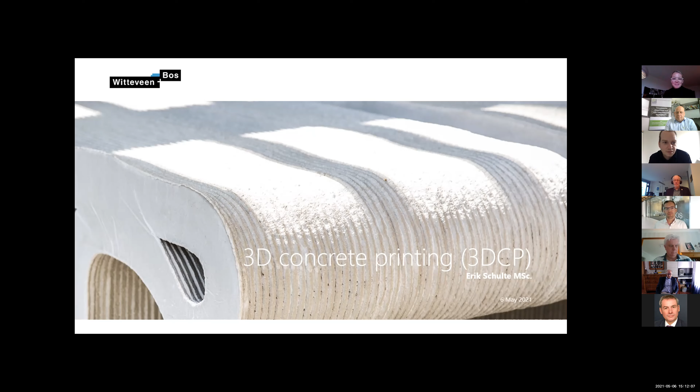Briefly about myself and my company: I work at Witteveen+Bos. We are an engineering consultancy firm founded in the Netherlands, and our head office is still there. We have about 1,300 employees, 8 offices in the Netherlands and 13 abroad. We do not construct any projects ourselves; we're just engineers. However, a few years ago, we bought this printer, this robot, to learn from this innovation. Currently we have a robot in the Netherlands and in Dubai, where we print projects together with the contractor, and one in Singapore for further research.

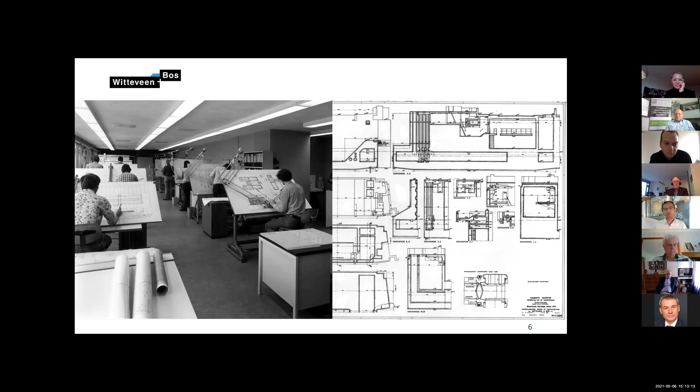50 years ago, long before I was born, the engineering firm looked something like this. And although I did learn to draw by hand during my study, soon AutoCAD was there. Initially only a pencil and a drawing board was the tool of the engineer. Everything was two-dimensional, and the contractor made it into 3 dimensions.

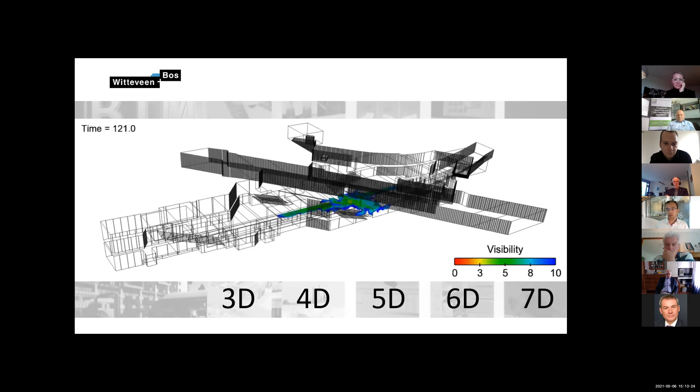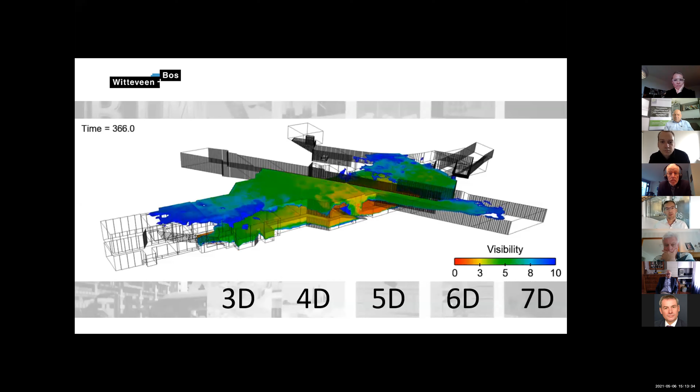Currently, engineering has evolved a lot. All our designs are made 3-dimensional. Here you see a simulation of a fire in an underground station in the Brussels metro. We make a digital twin, so we can investigate escape routes to the nearest fire exit.

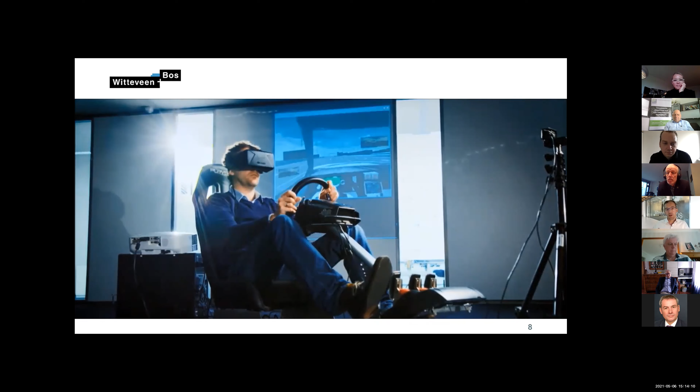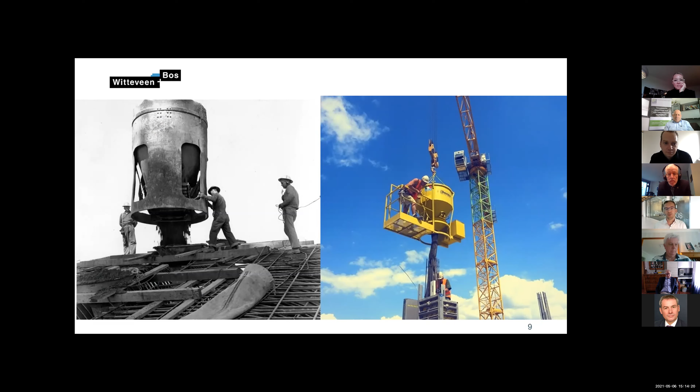So in engineering, there were a lot of changes, but looking at construction, not much changed in the same period. If you look at pouring concrete, it's still done the same way as 50 years ago. And looking at steel construction, it's done the same way too. Okay, maybe a few more safety measures on the side, but the construction did not have the same speed and evolution as the design did.

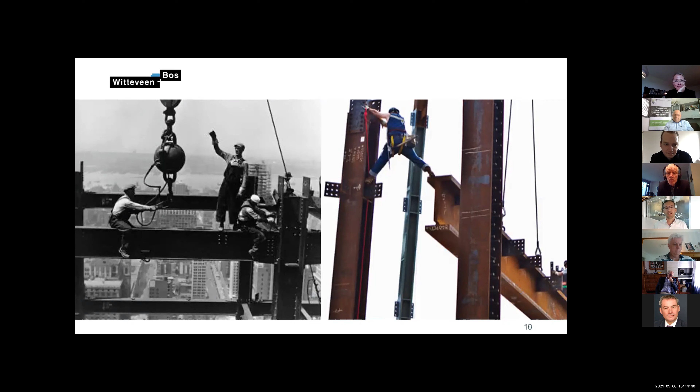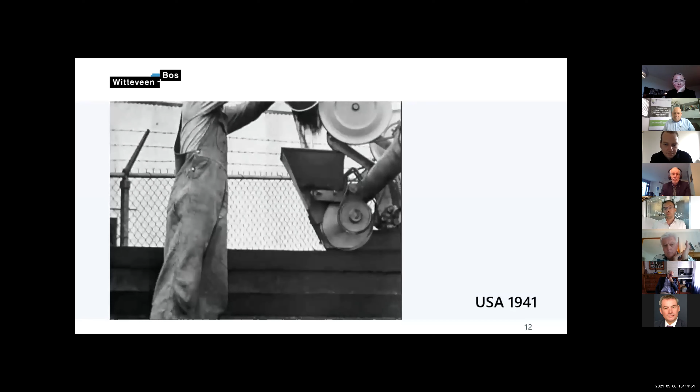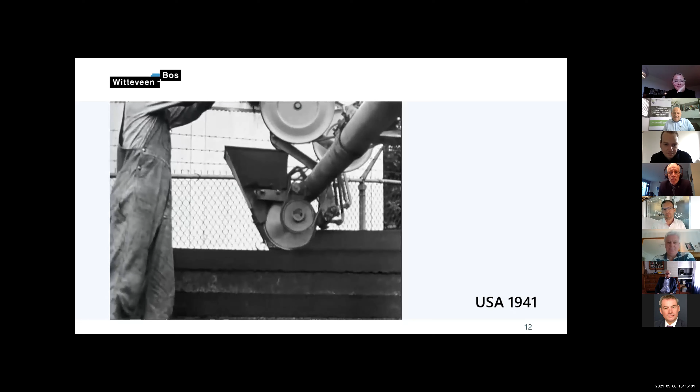But actually 3D printing is not new, because already in 1941, William Urschel invented this wall building machine. Again, not safe to put your hand in the machine, but he was able to pour concrete without formwork. You can look it up later on YouTube. A few years later, in 1944, he patented this machine, a wall building machine. But then it was silent for decades.

Only up to 1995, Dr. Khoshnevis found a contour crafting machine, and he actually built that machine. But then again, it was silent for many, many years, only into this century did projects really pick up. And a big evolution is ongoing for 3D construction in general.

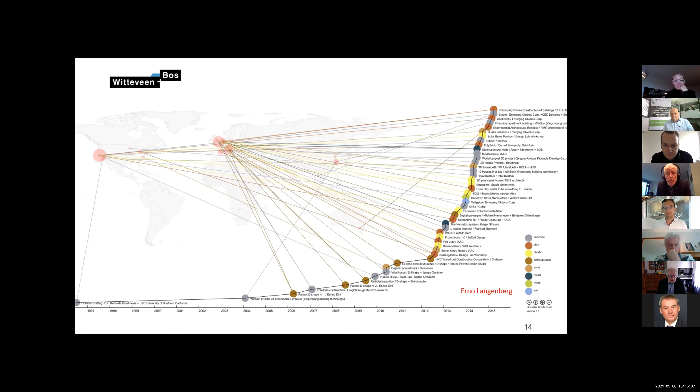Okay, how about the research for concrete printing? You can print in plastics and all sorts of stuff, but let's focus on concrete printing.

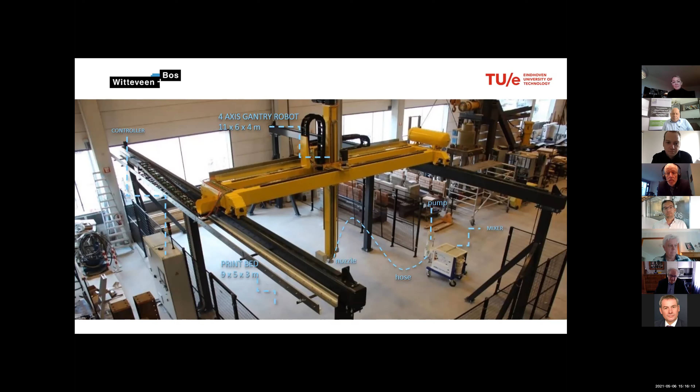In 2015, we joined the University of Eindhoven with the gantry printer. This printer has possibilities to move on the X, Y, and Z axis and actually lay a small slab of concrete, mortar, no stones in it. When you put this picture in motion, the left-hand side is actual speed and the right-hand side is fast forwarded. You see the printer is actually a 2D printer.

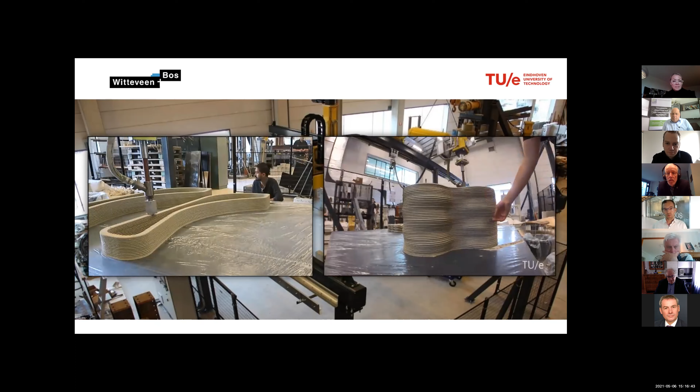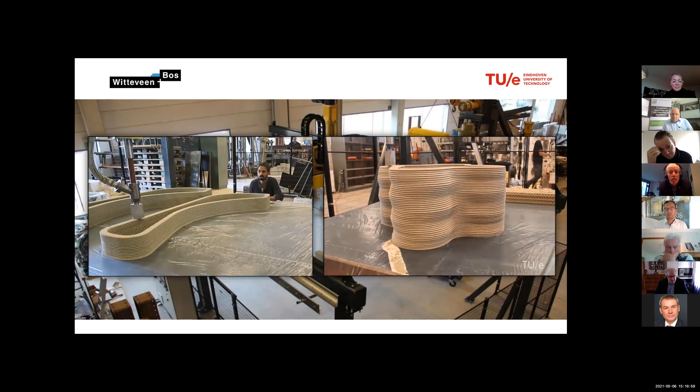It only prints layers. This is the key problem to engineer: the speed and the length of the printing path. The difficulty is that you have to print fast enough to have bonding of layers, so the concrete should be wet for the next layer to bond on. But on the other hand, you should print slow enough to get the concrete stiff enough. And the stiffness I can show you in the next movie. Look in the back on the left side.

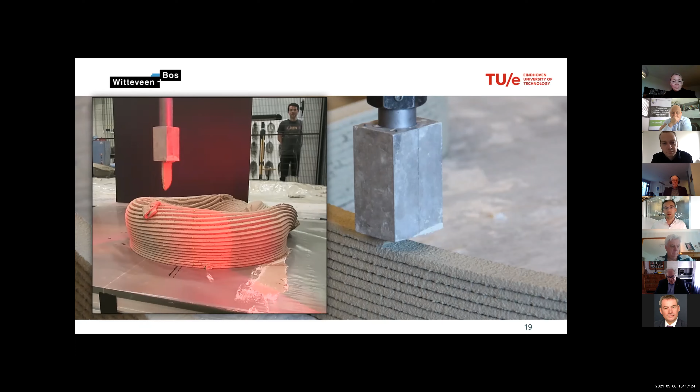It collapses. This is the key difficulty in printing concrete. On one hand, you want a stiff and dry mortar, then it will be stable. But on the other hand, it should be wet enough for bonding, and especially that bonding is key for structural concrete. So bonding is tested as well.

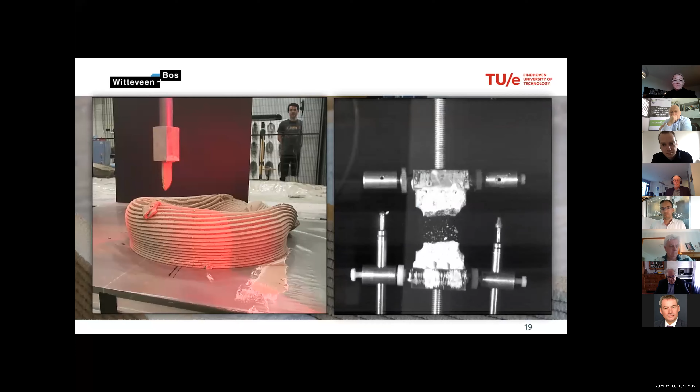How does the material look like? Difficult word, I'm not going to try to pronounce this, but actually you can compare it with ketchup. By itself, it behaves in a solid state, and only when you put in energy, it becomes a fluid. Same example is toothpaste: it is stable in the tube, when you press it, it becomes fluid, but on your brush it should stay there. So that is the difficulty in the research of the concrete mortar.

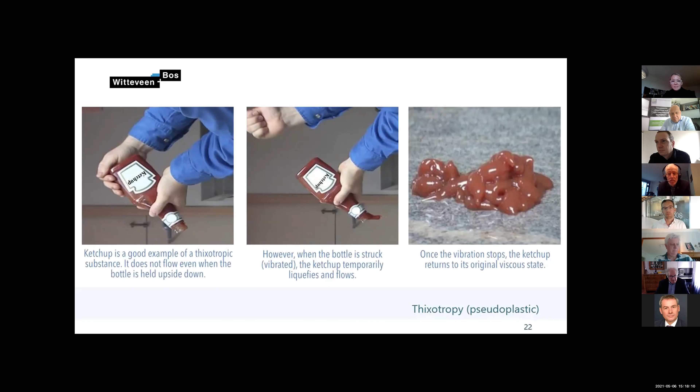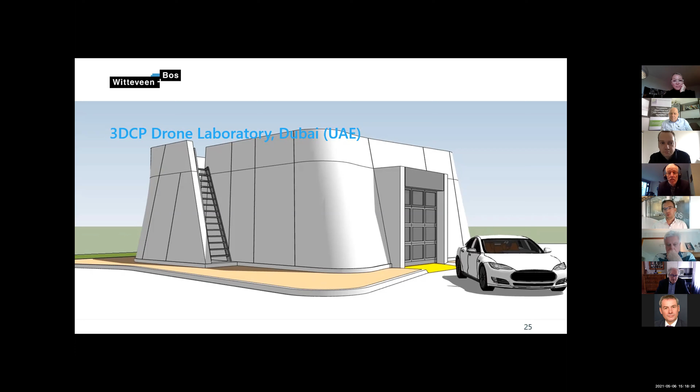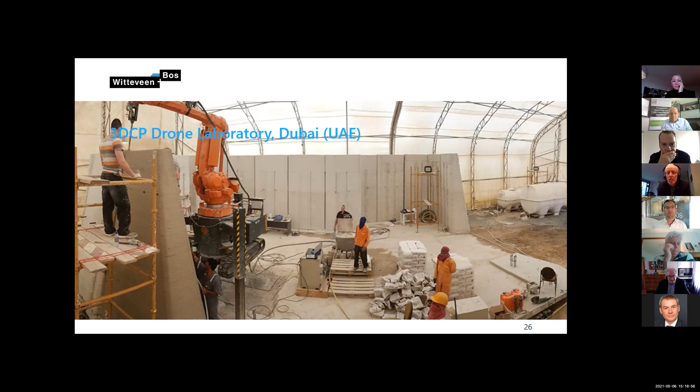Okay, some example projects. This building, you can say if it's a nice building or not, was designed for Dubai. On the roof of this building, drones should land for inspecting the solar fields. This building was printed on site, not in a factory, but in situ. The difficulty here was the climate - we're working in a desert, and what we all studied at the university can be thrown away because it is dry, it is hot. All environmental conditions are different. So unfortunately, we had to build a large tent around it to manage the climate a bit. But in the end, the building was finished.

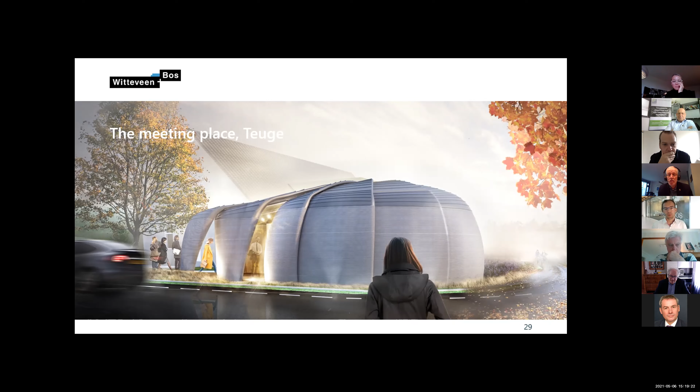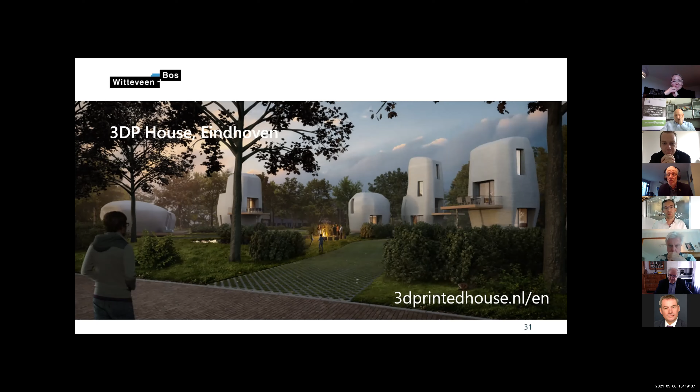And maybe you've seen it in the news - last weekend, the first 3D printed house was opened in the Netherlands. This milestone project is in Eindhoven as well, and this picture is right from the news. You can even see the grass rolls are still fresh, you see the lines in the grass. So this is completely new and innovative. People are renting it already.

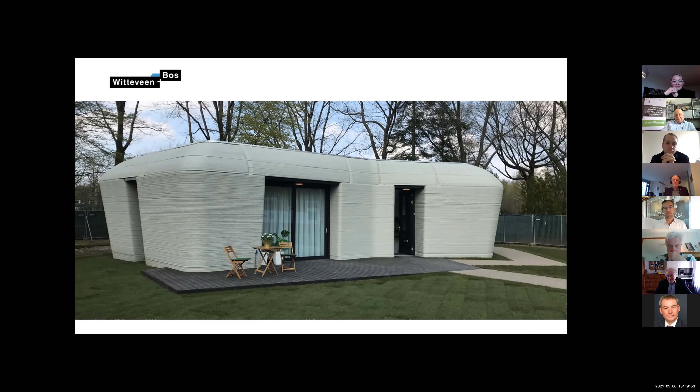Beside the buildings, we also tried to design a bridge. You can argue about if it's a nice bridge or not, but we started simple because we have to convince the government that it is safe, and that was the difficulty. So we started simple, and it looks like pulling a bookshelf, like pressing books to each other to hold it with post-tensioning cables. The middle part is printed, and the end parts are precast concrete blocks with pre-tension cables. In the end it was opened, and it was the first 3D printed bridge. You hardly can see that it is printed, but it was the first step.

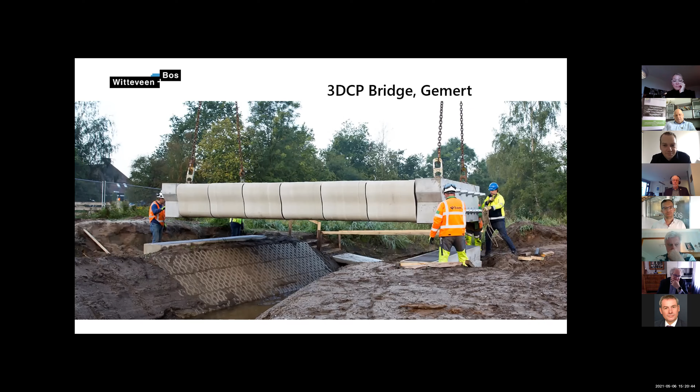Then we came to the next bridge, a bit bigger - I'll come back to that later in the cost estimate. This bridge was more curved and architectural, and here you see the actual elements are hollow. This is also printed in a factory, not in situ, and the hollow areas are filled with pebbles to support the curved faces. This element was printed in about 6 hours, so from a design into a prefab element, it is really fast. You skip a lot of steps, and the printer can work 24/7, so it doesn't matter - you come next morning and it's ready.

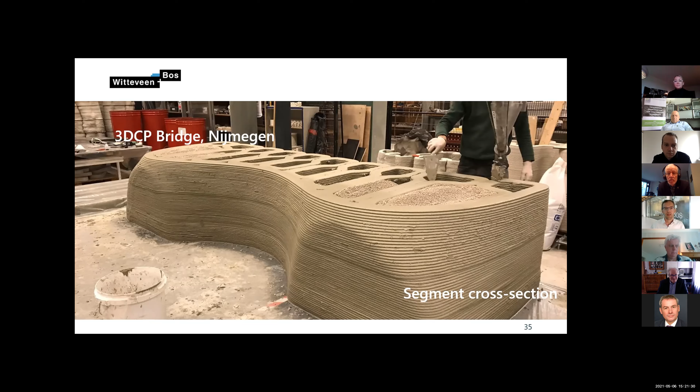And the last example project I'm going to show before we go to the cost estimate is this one. Actually, it's a series of bridges in a province, North Holland. All bridges are alike, like a family of bridges, and they're all kindly different shaped, and currently being printed.

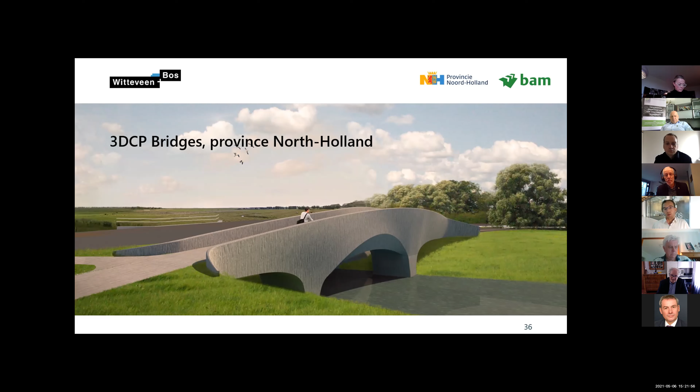And we did not write down all the knowledge into a book or a white paper. No, we have written a software tool with it. So now the software is able to not only design, but also calculate the structure.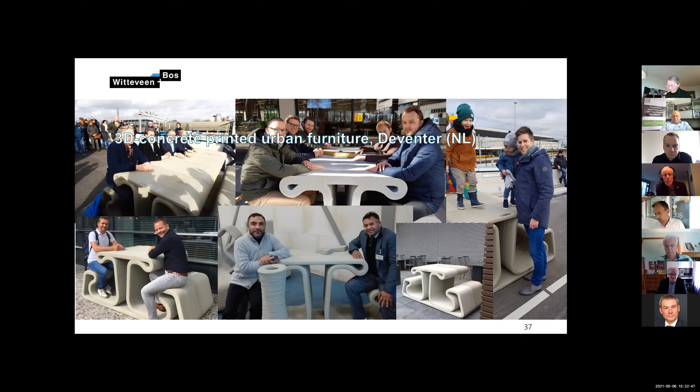Let me check my clock. I think I'm on track. Let's go to the cost estimate.

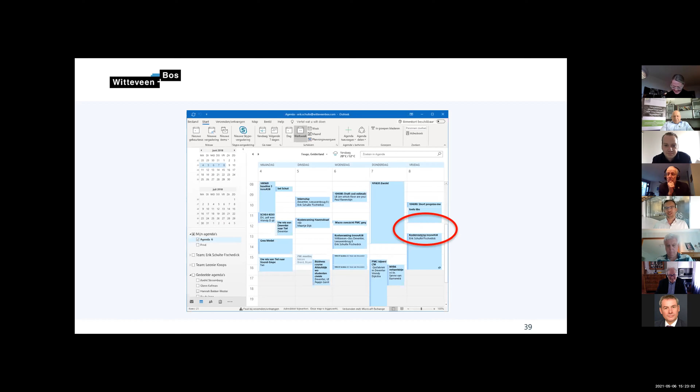Maybe you know that typical cost questions are always asked on a Friday afternoon. I don't know why, but this often seems to be the case. And it was a Friday afternoon. My colleague Hans called me: Eric, what are the costs of a bicycle bridge? So I imagine a small off-the-shelf wooden bridge from a supplier, maybe 75,000 euros.

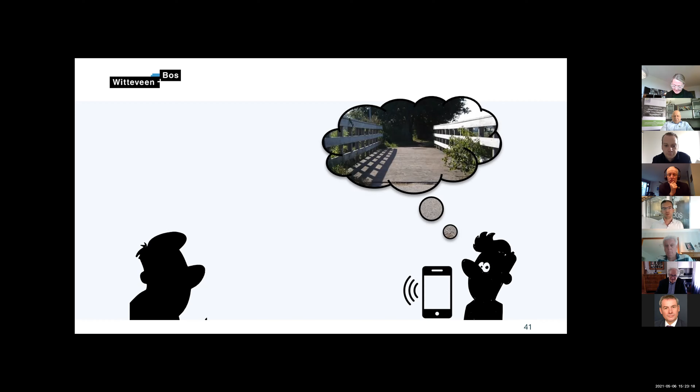Call it the beam across the ditch. No, Hans said, it should be a concrete bridge. Okay, a simple concrete bridge, let's say 90 square meters times 1,250 euros plus indirect cost, maybe 150,000 euros. No, he said, based on architecture.

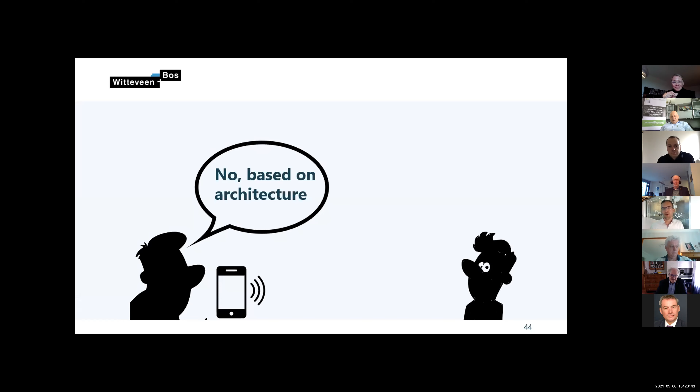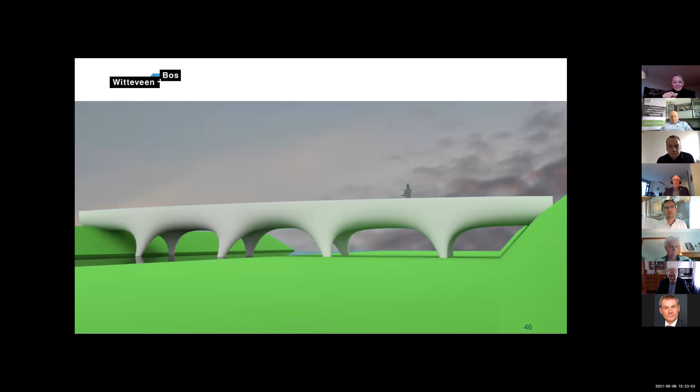So you noticed Hans was teasing me a bit. Yeah, bicycle bridge based on architecture. And asking further, the truth came out: this was the design of the Nijmegen Bridge. Wow, that one is not in our Witteveen+Bos cost database.

So how to make a cost estimate for this one? Do we have any good references? Actually, we don't. We only have this kind of ugly bridge in Gemert. But actually, it was good enough as a reference for the cost estimate. So you cannot make it as a benchmark or do reference class forecasting. No, you can still use it to have a bottom-up cost estimate. So the experience gained over there was used in Nijmegen.

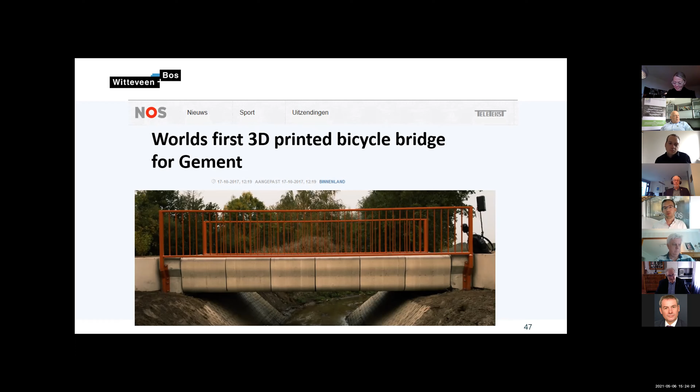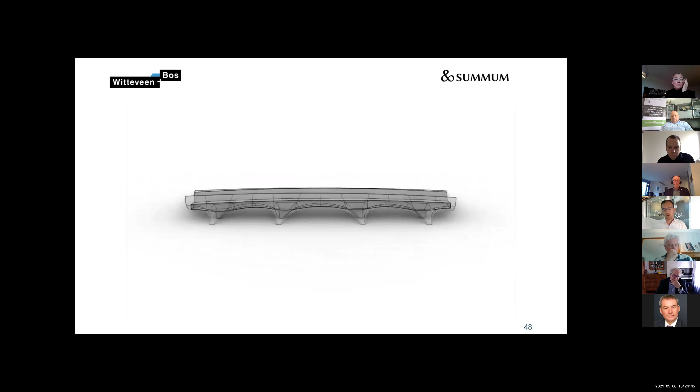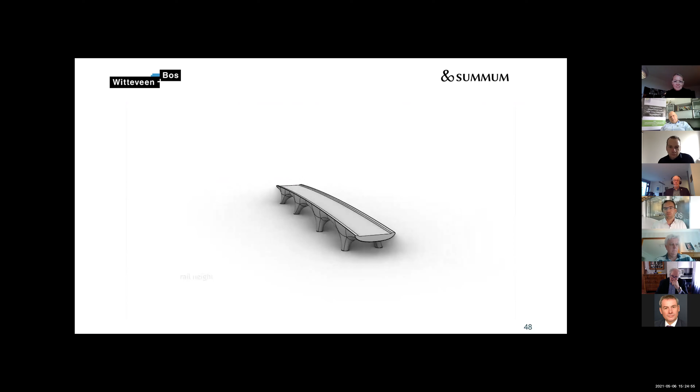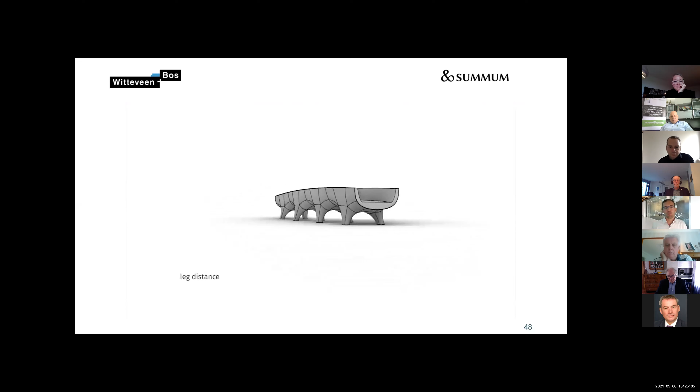All our designs are based on this parametric model, and this parametric model is key for the design process. So not only visualizations are generated, but also the calculations are made. And of course you can put unit rates into the model, but actually, personally, I don't like having a live link of costs in the model. So maybe that's old school, but the cost estimate is not completely automated. But the printer code is generated as well, the G-code.

And of course, a big benefit is that many bridges can be generated with the design being slightly different. So let's come to the cost estimate. If you want to refer it to an architectural bridge, we have to make a comparison as well.

Now let's say, what will the formwork cost? Maybe 100 euros per square meter for the support structure, and maybe 150 euros per square meter for the form system itself. So we have 250 euros per square meter for the formwork, and 0 for the printed bridge. So printing is still favorable.

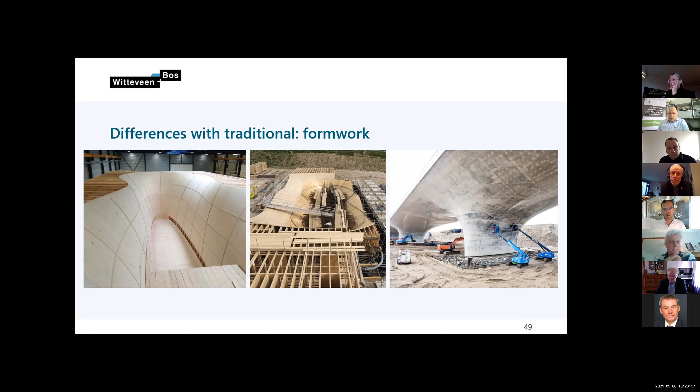Next, we need reinforcement, of course. So in the curved bridge, all the reinforcement is bended and curved as well, so this was quite expensive. So how much reinforcement do we put in? Maybe 175 kilos per cubic meter, I assume - it's civil, not building industry.

And now what will it cost? Maybe a bit more than 1 euro per kilo, so let's say 190 euros per cubic meter. 0 for our 3D printer, because we cannot print rebar yet. So 2-0 for the printer.

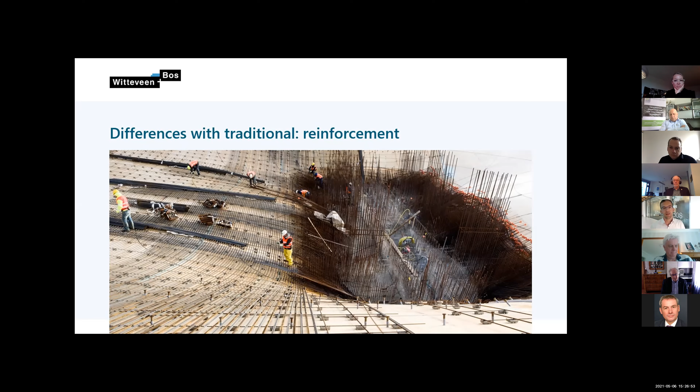Then we can start pouring concrete, right? So traditionally we have about 5 men working around with the vibrator and so on. Maybe including the mortar, 130 euros per cubic meter. And here our mortar is ready-mixed concrete, so it's a dry mortar, and that makes it more expensive. Also, a lot of research and development goes into it, so the mortar is way more expensive yet.

And officially I'm not allowed to state the actual figure, but it's about 7 times more expensive than traditional concrete per cubic meter. Another disadvantage of the printed bridge is that the volume is larger than with a precast concrete bridge or an in-situ bridge, so we have a larger concrete volume. Of course, we have hollow areas as well, maybe up to 40%. So in total, the concrete is way more expensive.

And now we can start printing our bridge, right? Sorry, we can't.

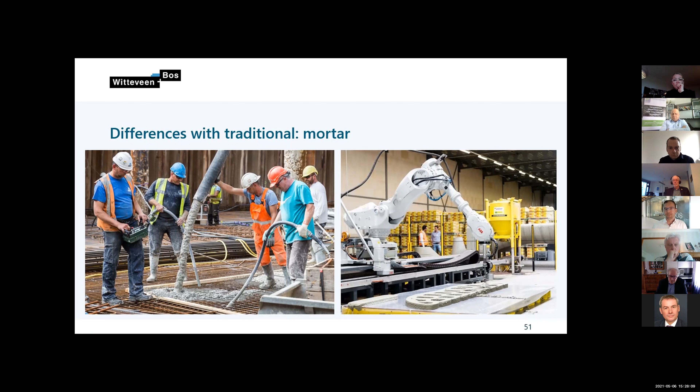We have to prove the design, and there are no regulations or norms to make a structural calculation for printed bridges. There's no Eurocode for that. So to prove our design, we need to follow this quality protocol.

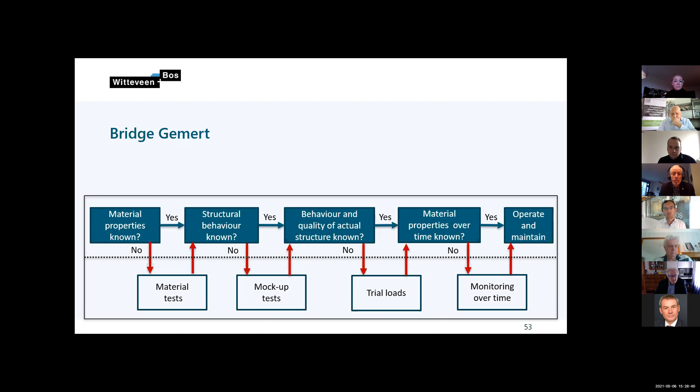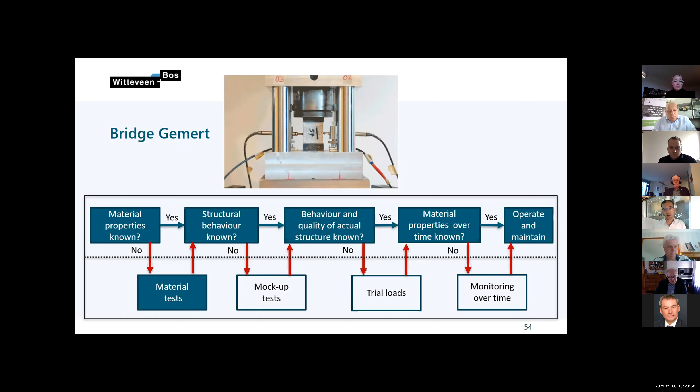In the first bridge, the straight bridge in Gemert, it looked like this. We do not know the material properties, so we have to test the concrete. Then the next question was, is the structural behavior known? Again, we said no, so we have to make a real scale bridge and press it to test it on the bench and prove the structure. That was quite a disadvantage for the cost estimate.

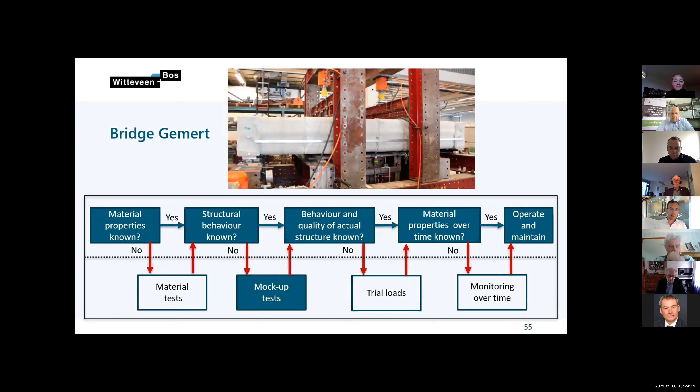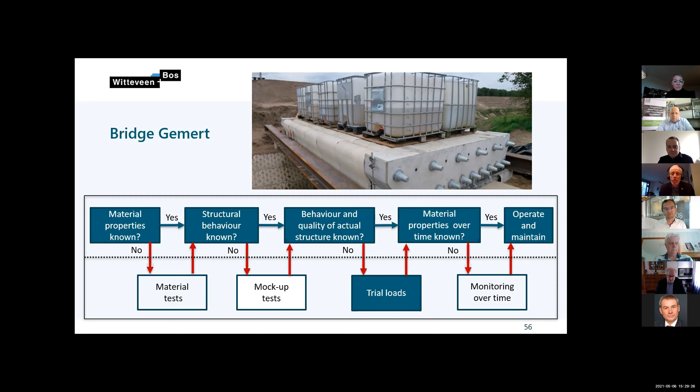Finally, the last question was, are the properties known over time? Again, it's not. We do not know the behavior of the structure over many, many years, so a lot of cost goes into monitoring. To be honest, we don't know the lifespan of the bridge. Structures are designed for maybe 100 years, but this printed bridge, we don't know.

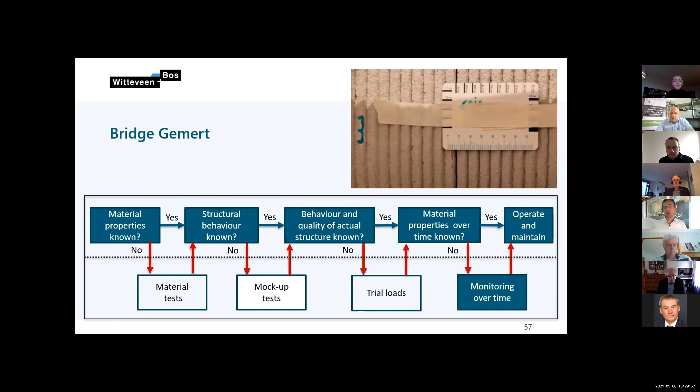Okay, so this was my example. Now go to the Nijmegen bridge, where we had to make the cost estimate for. We can skip the first part because we know the material properties, we've tested the cubes in Gemert. But because this design is totally different, we cannot say we know the structural behavior.

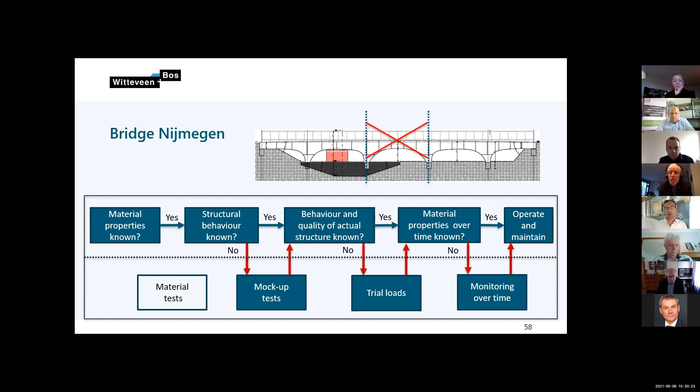So this is not a joke: we have to make a real scale element, one third of the main span, to be tested according to the protocol on the bench. So this is one printed element being rubbled again, being aggregates. That is difficult for the cost estimate as well.

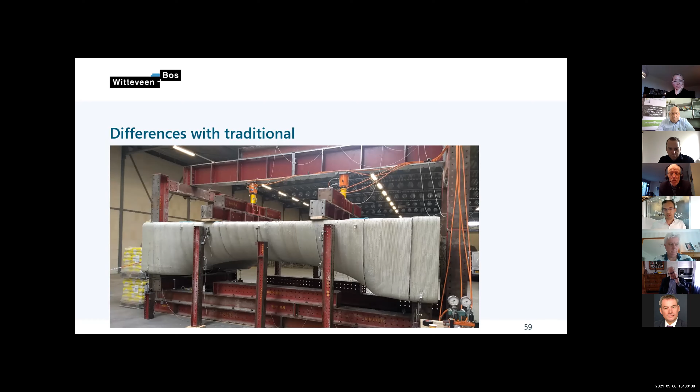So now summarizing it, let's say on the left-hand side we have a traditional bridge, and on the right side the printed bridge. The abutments and the foundations may be comparable, assuming the weight is comparable. Then we had our formwork. As you've seen, we don't have any formwork in the printed bridge, so still in favor of the printer. The rebar, it's not there yet, so traditional is more expensive.

Then comes the mortar. You see, it's getting closer. The mortar was more expensive, but it's still cheaper to print a bridge. Now we have to do some finishing works, maybe some light and road markings and so on. Now you would assume that the printed bridge is cheaper, right?

But if you've noticed, the tests were not there yet. Also, we have to hoist the elements and make a support structure. The anti-graffiti coating was more expensive, and we had some extra deck to avoid sun cracks due to surface tension. Yeah, and our mock-up test. And then again, all our investment and research and the universities. So we're not there yet, but we believe that by putting in effort here, in the future the costs will be competitive, and all the research is done and we've learned from that.